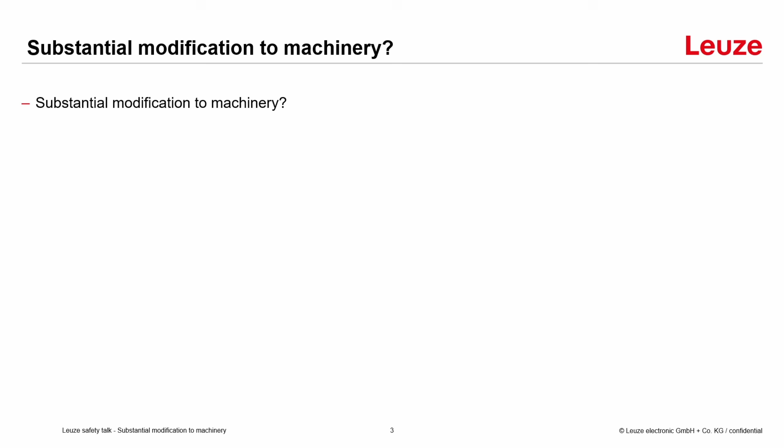Yeah, substantial modification, that's always a big question that we get from our customers. Is it a substantial modification or not? And what's the consequence? So that's why I would like to talk a little bit more in detail in this video about it. At first, we would like to have a little look into the guide of the European Commission to the Machinery Directive. And here we will find some information.

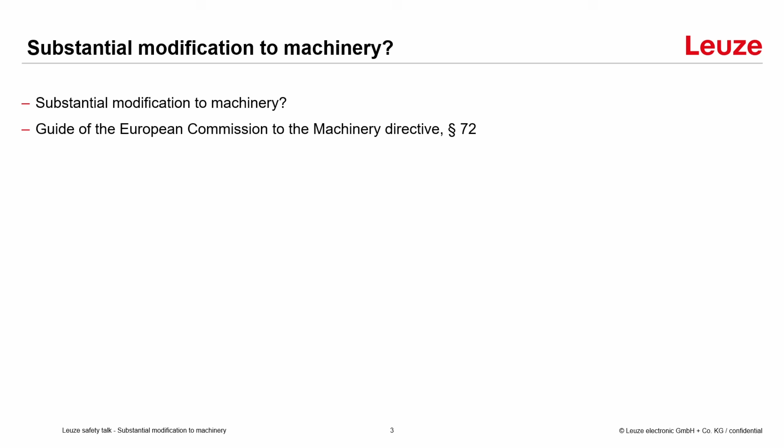And it says, the Machinery Directive also applies to machinery that has been transformed or rebuilt so substantially that it can be considered as a new machinery. Unfortunately, it also says here in the last sentence, it is not possible to give precise criteria for answering the question if it has been a substantial modification or not.

And that was also the reason for the interpretation paper on substantial modification to machinery from the Federal Ministry of Labor and Social Affairs already in the year 2015. Because the ministry has also seen that there are many questions about it. Is it now a substantial modification or not?

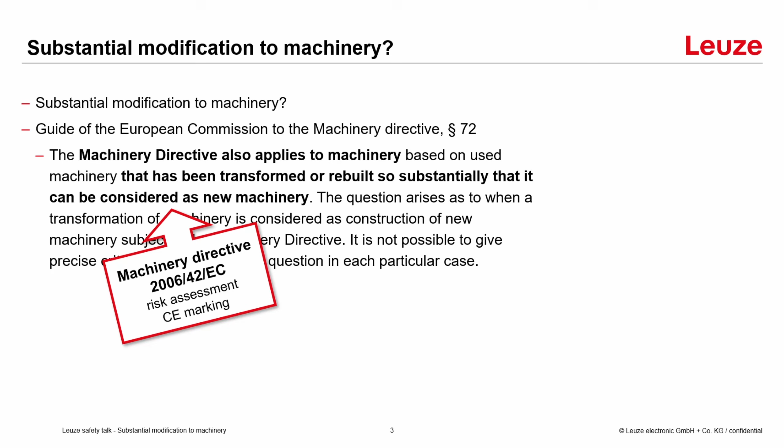Because if it is a substantial modification, then also the Machinery Directive applies to this new machinery. And that means we have to do a full risk assessment of this new machinery. We also have to do the complete CE process and then the CE marking in the end. And in this interpretation paper, we also have a little guide, and this little guide I would like to show you.

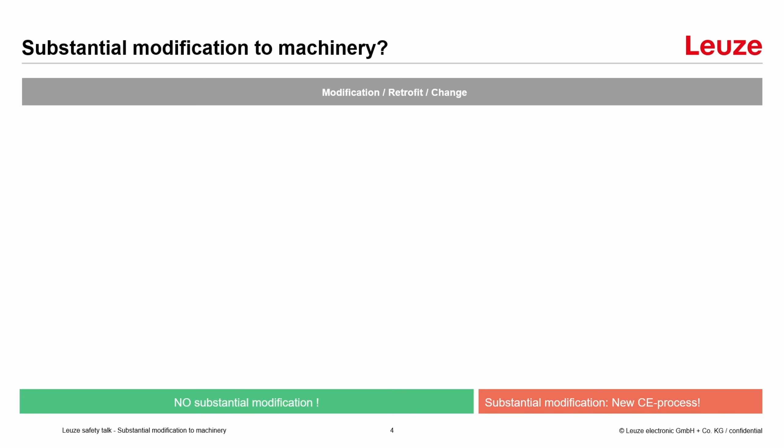So the first steps that we are doing, we do a kind of modification, a retrofit or a change in our machinery. For example, we exchange a PLC. And every time we do a replacement one by one, so we replace the exact same parts that we had before, or we replace it by comparable components. So it's not 100% the same, but in the end, the function of the machinery will be the same again.

Or if we do a retrofitting with additional safety technologies, so that means in the end the safety of the machinery is improved, so the machine is more safe than it was before, then it will be never a substantial modification. So in this case, we are fine.

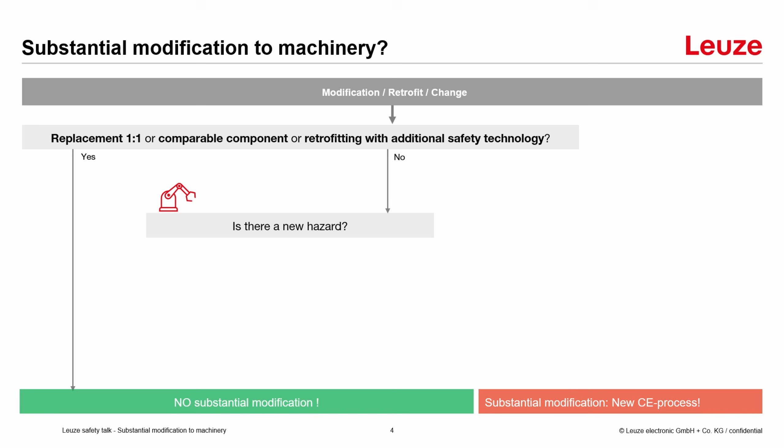So most of the time we have a no here, and then the next question which is coming up, is there a new hazard? So new hazard means due to our change that we have done, have we changed something in a way that we create a new hazard? If yes, then there comes up a second question, which is, does the new hazard lead to a risk? Because the new hazard does not automatically mean we have a new risk.

So risk and hazard we have talked about in the last video. So there's a difference, and a new risk happens only if the person and the hazard come together. So the question is, do we have now a new risk? If no, then it's also no substantial modification of our machinery. If we don't have a new hazard, then it's still possible that one of the risks that we had already before has been increased.

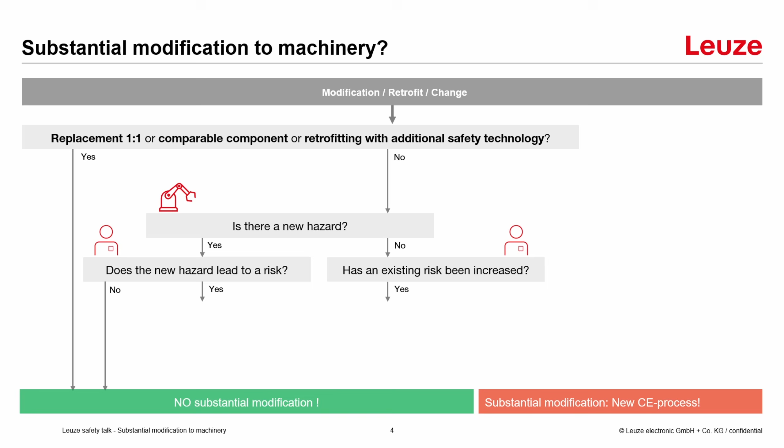So, for example, the machine is now moving faster, so that means we have a higher potential that someone gets hurt on this. So, one of the risks has been increased. If we have a yes here, or if we have a yes on the other side here, then the next question is, are the existing protective measures sufficient? So we have already some protective measures on our machine, for example, a light curtain or a fence, and maybe it's possible that these protective measures are still sufficient enough. If yes, then it's also no substantial modification.

If no, then there's the last possibility, and the question, can the risk be eliminated or sufficiently minimized with simple safeguards? Simple safeguards are fixed guards, so a fence, for example, interlocking movable guards, so a door, for example, or protective devices like light curtains or laser scanners, as they do not interfere significantly in the current safety-related control of the machinery. So it means, for example, we have already a safety relay on the machinery and we adapt our light curtain to this safety relay, so this would be fine.

If we have a yes here, then that was the last possibility, that we don't have a substantial modification, and that's good. That's what we want to have. So we do a little checklist and say yes, yes, yes, everything's fine, and we did not do a substantial modification. We just write down what we did, and that's it.

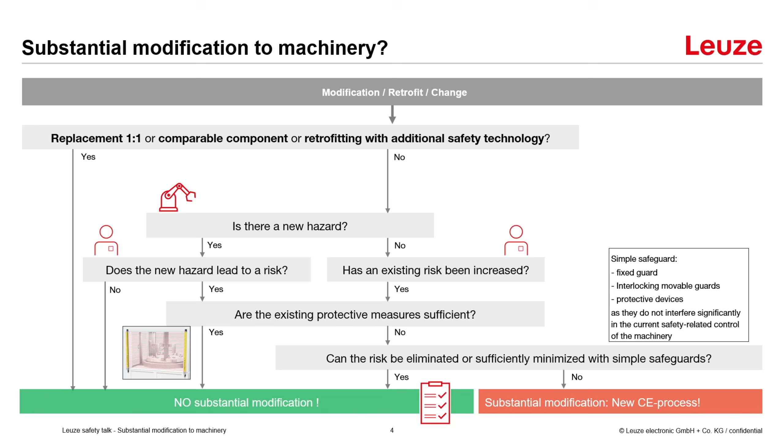Because if we come to the point that we have a no here, then in the end it will be a substantial modification, and as we have heard before, then we have to do the full CE process for our new machinery that we have now built. So we are now the manufacturer of this machinery, and maybe this machinery is already 20, 30 years old, and so we don't have good documentation about it, and we are now the manufacturer of this machinery and have to do the full CE process. So that's definitely something we don't want to do.

Yeah, there's one thing missing in this graph. Before we can decide if we have additional hazards or new risks or increased some risk, of course, we also have to do a hazard analysis or a risk assessment before we start the modification. Otherwise, it's really hard to say, have we improved something or have we changed something, new hazards, new risks. If we don't know the status before the modification, we cannot be sure if we have changed something of these points. So that's something you also should do.

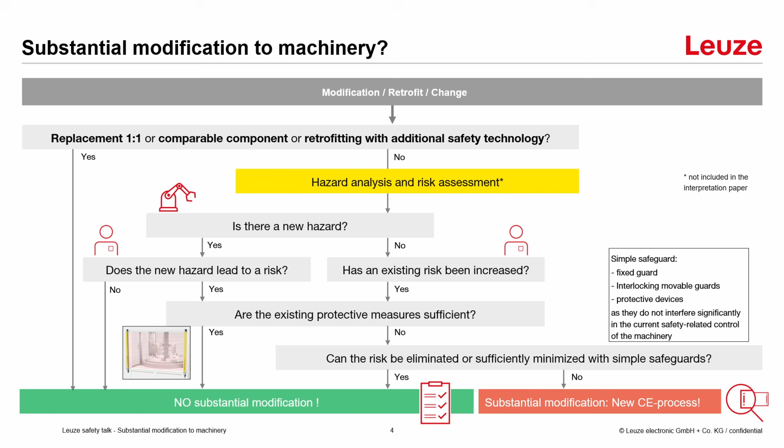Sure. Yeah, thanks, Markus, for your presentation. One question which came up frequently was, what happens with my CE marking? Yeah, so talking about the CE marking, we really have to decide between the two ways that we had. So if it is a substantial modification, then we also need a new CE marking for our machinery, because then the machinery directive is saying you have built a new machinery, so all the old CE marking is gone and you have to do everything completely new, including all new documentation, new risk assessment, and so on.

And if it's not a substantial modification, which is the better way, for example, if you just add some safety to your machinery with new light curtains or new safety devices, then it's never a substantial modification. So that means that has no consequences on the CE marking that you have already on your machinery. Yeah, thanks for the clarification.